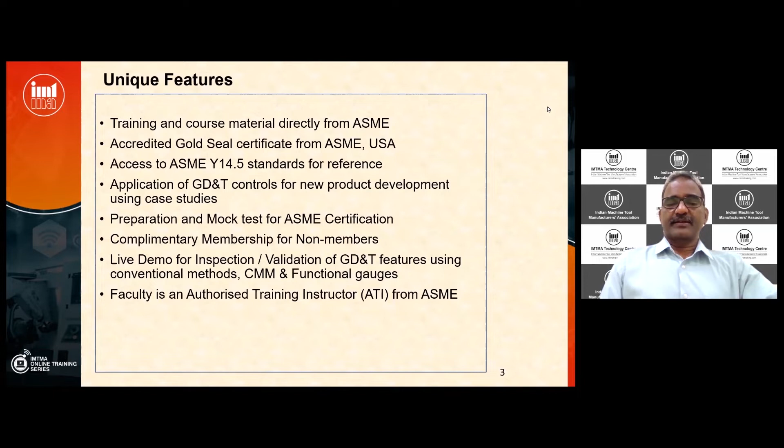And the faculty, in this case myself, I am the authorized training instructor, ATI, on behalf of ASME, and I am authorized to deliver programs on behalf of ASME in India for both technologist level as well as senior level certification programs. I had completed my senior level GDTP examination, and I am a certified senior GDTP professional.

The benefits to the participants include a complete understanding of GD&T right from the terminology up to the 14 parameters, and what is the relationship between the various controls and the terms, including RFS, MMC, LMC, then RMB, MMB, as well as LMB. And interestingly, when to use what control, which forms the important aspect of the entire GD&T domain.

We will go through a structured approach while discussing datums, that is nothing but the datum reference frame, or in short DRF. What are the requirements of datums? How the datums constrain the degrees of freedom, all the aspects.

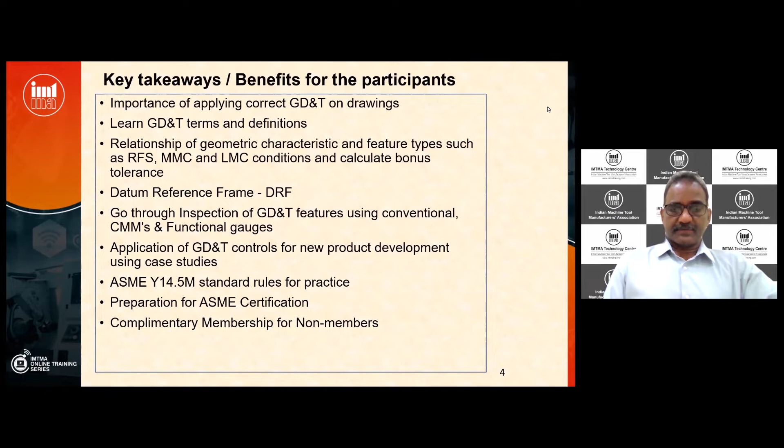Then practical inspection of GD&T controls. Then case studies to understand the application of GD&T parameters from a designer's perspective. Then what are the standard rules as per ASME Y14.5? Then tips and tricks for preparing for the ASME certification examination and complimentary membership.

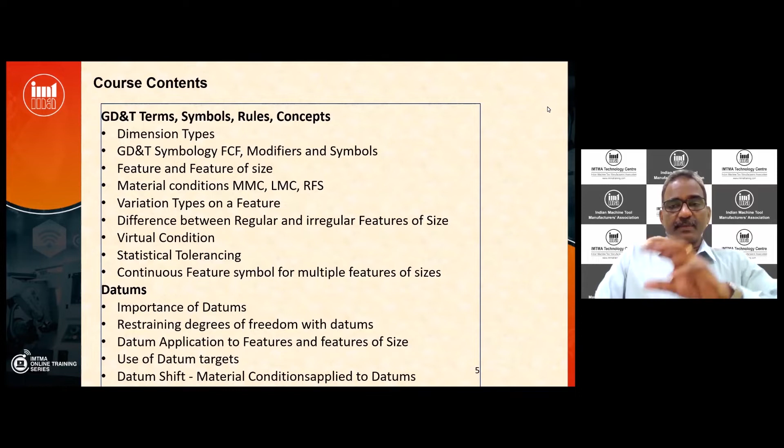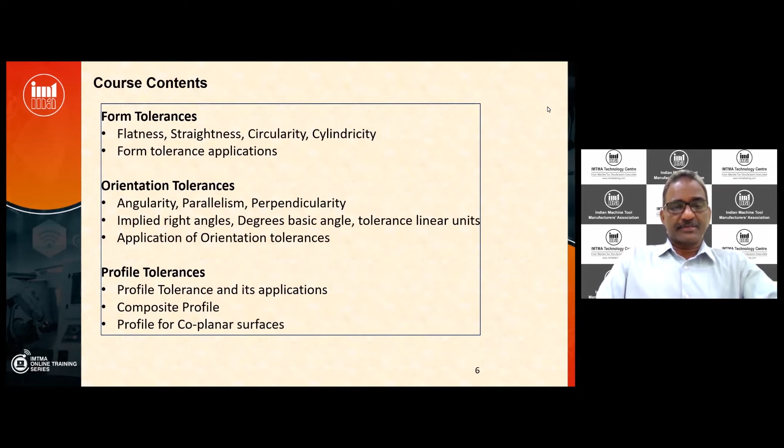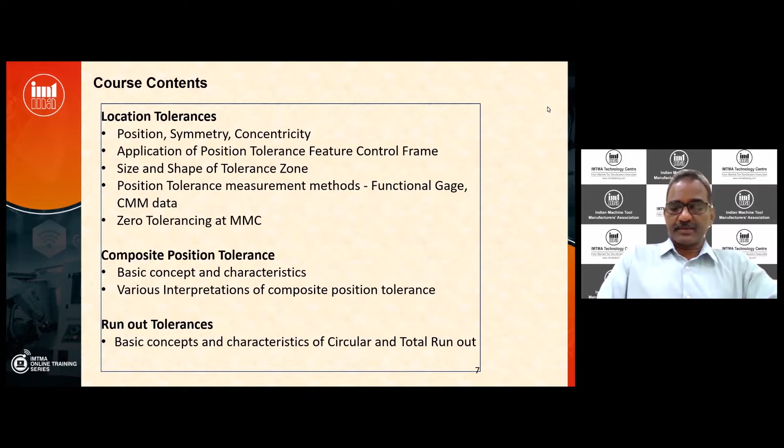The course coverage would include a complete familiarization with the various terminologies, then the datums, then the individual parameters coming under the group of form parameters, orientation parameters, profile parameters, location group of parameters, as well as in detail about the importance of position tolerancing. What do you mean by composite position tolerance? What are their applications? Then lastly, the runout group of parameters.

About the importance of GD&T, it's a well-known fact that proper implementation of GD&T in the right manner will enable cost reduction in manufacturing, as well as lead time reduction in the entire cycle of design through manufacturing.

And since GD&T is a common language across the entire value chain, that means within the functions in a manufacturing organization, as well as across customers on one side and suppliers on the other side. And today, the understanding of GD&T is more and more important as the customers and suppliers are located throughout the globe.

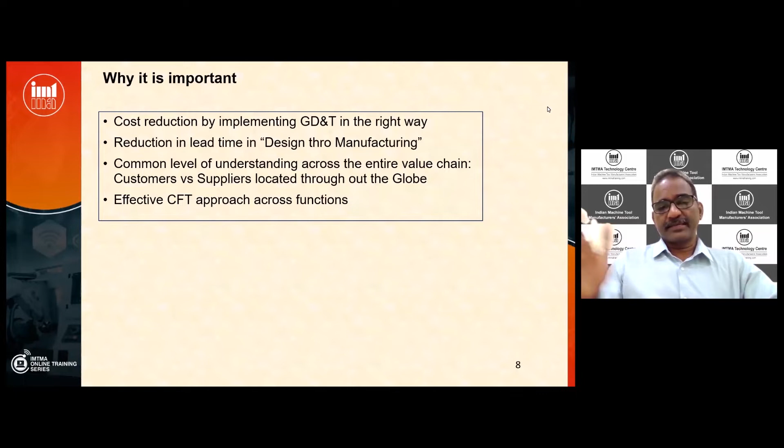And yet another important aspect which is noteworthy is that proper understanding of GD&T enables an effective cross-functional team approach, CFT approach, involving various functions within the manufacturing organization. Thereby, the better design can be evolved and day-to-day challenges can be addressed and solved, so that the entire lead time in design through manufacturing can be reduced, which is ultimately leading to cost reduction.

To whom this program would be applicable? We can say in a nutshell, this program is applicable across the organization since it is an international language, and it is applicable to engineers and executives, junior to senior level management professionals from all the functions, right from design or R&D and new product development, production engineering or manufacturing engineering, then the production and assembly, then quality assurance or quality control, then sourcing and service and application.

So thereby, GD&T cuts across multiple functions within a manufacturing organization. And as such, thorough knowledge in GD&T is essential so that meaningful communication can take place between the suppliers and customers, and within multiple functions within an organization.

And this program is not only for manufacturing organizations, it is also applicable for engineering service providers, where they undertake value-added services, right from new product development or changes in the design, updates in the design, where their customers could be located anywhere else in the globe, and the engineering service providers located in India are extending their services in various design and development and engineering functions.

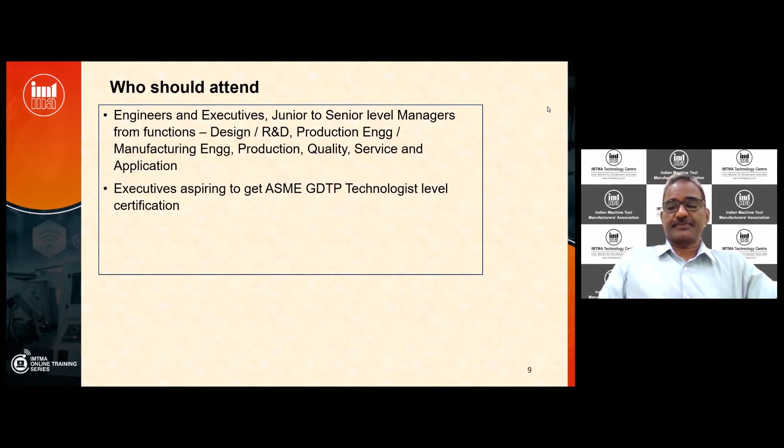About IMTMA, Indian Machine Tool Manufacturers Association, established way back in 1946, is an authorized training provider, ATP, for ASME, and IMTMA is certified for providing IACET accredited ASME training courses on this particular standard, that is GD&T Y14.5, for engineering professionals across the country.

And IMTMA has a state-of-the-art training facility called the Technology Center, located at Bangalore International Exhibition Center in Bangalore, with complete CNC machines as well as metrology lab supported with CAD/CAM, CAE, and all the other accessories. And at IMTMA, we have trained more than 2,000 professionals in GD&T across the country, from all the functions of a manufacturing organization, as well as engineering service providers, as well as aerospace industries.

And the training methodology is unique in the sense that the classroom sessions are supported with live demonstrations, as well as workbooks and group exercises, so that the understanding becomes complete. And at the end of the training program, the participants are really in a position to implement the GD&T standards in their own projects.

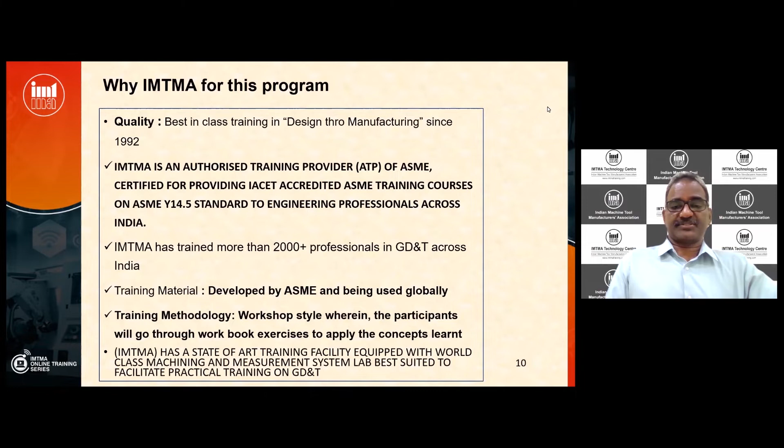And a quick word about the GD&T certification from ASME. As all of us know, ASME is the originator of GD&T standards, and the first standard in Y14.5 has been published in the year 1994. Prior to that, it was called ANSI, ANSI 1982 version.

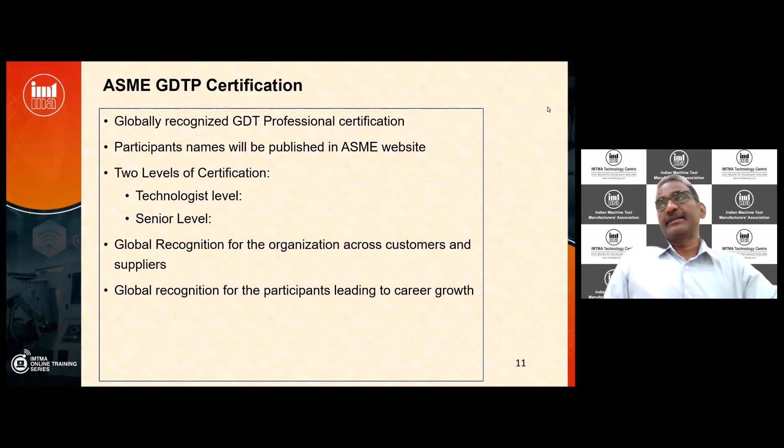And in order to give global recognition to the trained professionals, ASME has come out with professional certification in 2 levels. The first level is called the technologist level, and the second level is called the senior level. And both the levels will bring in global recognition for the organization across the customers and suppliers, at an organizational level. And secondly, for the participants, it again brings a global recognition leading to their further career growth.

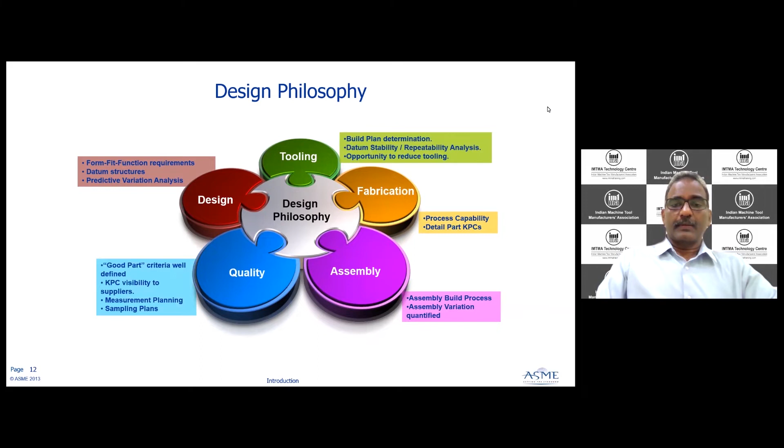Let us talk about how GD&T is applied in a manufacturing organization. Today, we live in an era of concurrent engineering rather than sequential engineering. And concurrent engineering philosophy involves the coordinated approach across multiple functions, including design, tooling, then manufacturing, assembly, as well as quality, so that the entire lead time of design through manufacturing is reduced and the complete design becomes sort of error-free, so that there are no challenges in the downstream applications, right from tooling, manufacturing, quality, etc.

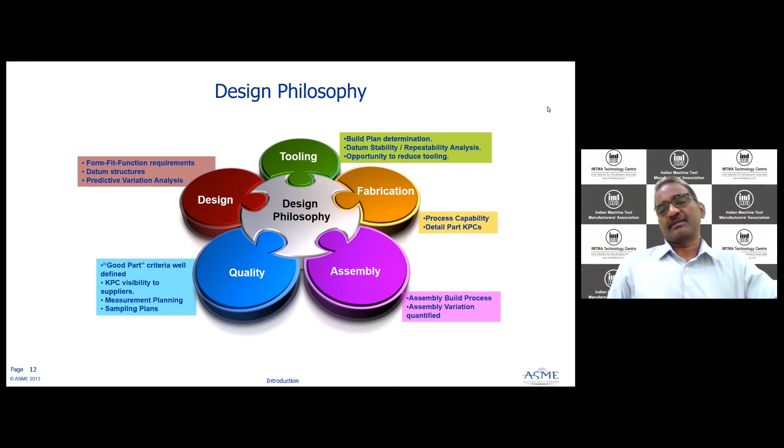So thus it involves a cross-functional team approach so that the challenges are identified at the design stage itself and countermeasures have been incorporated at the beginning before the design is frozen and released to the downstream applications. Here, GD&T plays a huge enabling role so that the intent of the designer is well communicated across the multiple functions within the organization and then again across its suppliers as well.

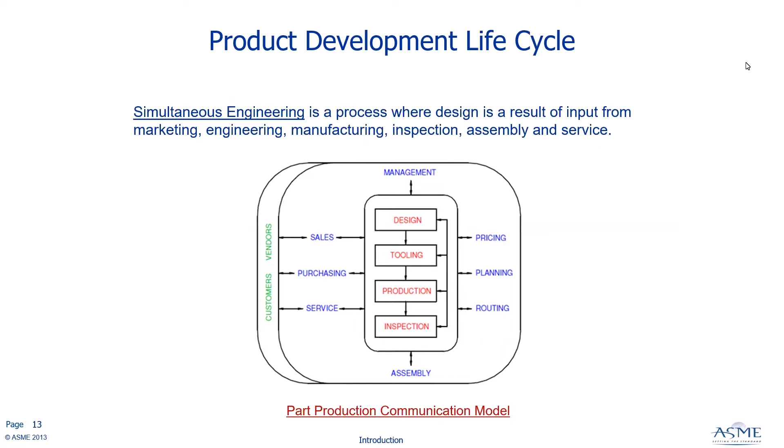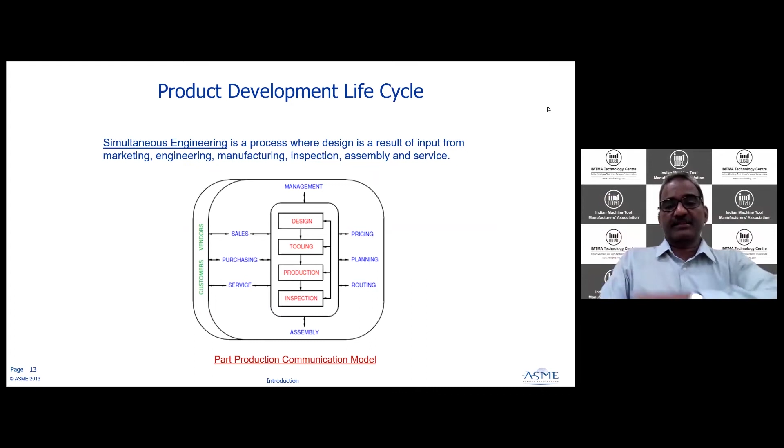And the concurrent engineering, or the simultaneous engineering, is active dialogue and two-way communication between the concerned departments so that the lead time is reduced and further challenges are minimized or nullified.

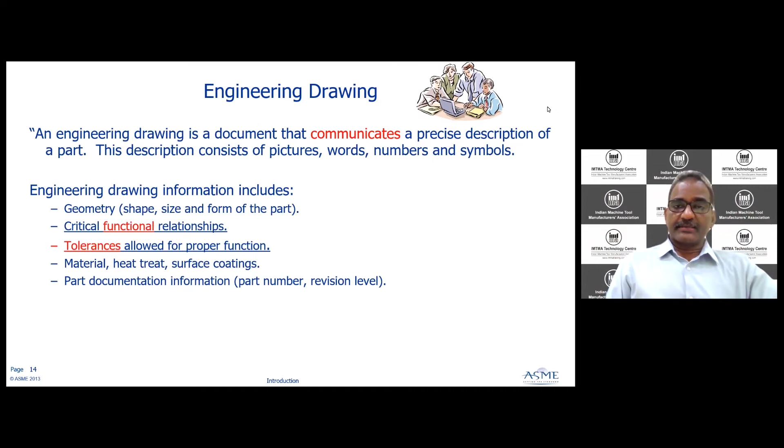And as all of us know, the purpose of engineering drawing is effective communication of the entire data, including the geometry, functional relationship, tolerances, plus the peripheral information, material, heat treatment method, coatings involved, etc., along with the documentation terminologies.

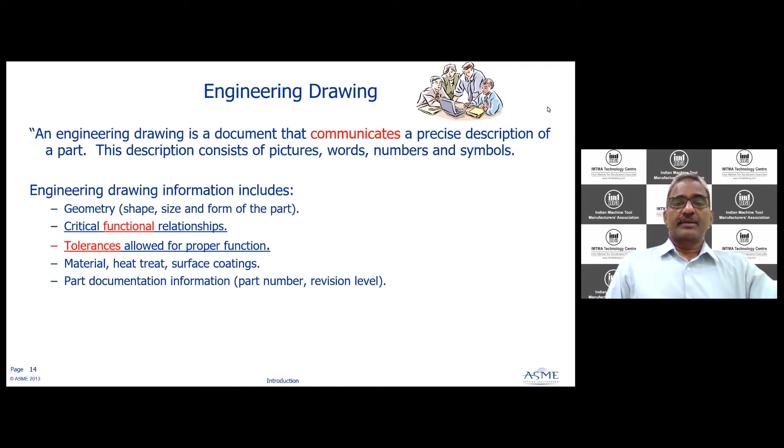For a moment, let us imagine if the GD&T symbols, which are shown in the last column, are not there, whereas the communication happens in a particular language, in this case Chinese. Then how can the activities be carried out in a global manner across multiple customers and suppliers located throughout the globe? In this particular slide, the explanation is in Chinese.

However, if you are not comfortable understanding the Chinese language, then we don't have any clue what is meant in these wordings, right? Whereas if the same information is conveyed through the symbols as listed in the last column, then the understanding becomes universal in nature and there is no need for any text, any communication in a given language. So that is the power of GD&T, which is a universal language.

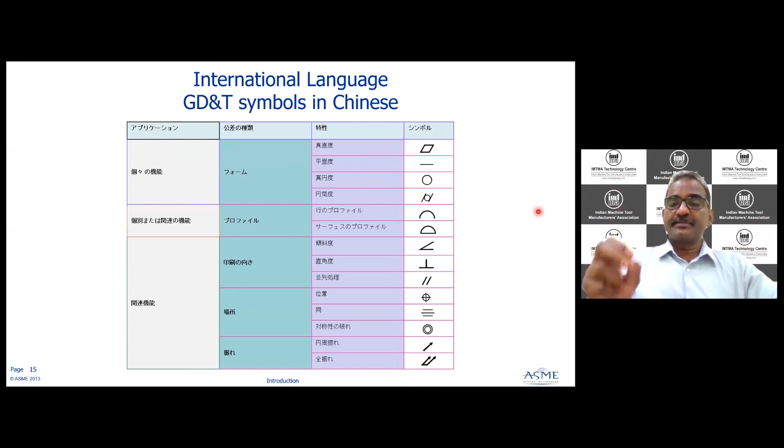Be the customer or be the supplier, located anywhere in the globe where multiple languages are spoken, communication always becomes a bottleneck and understanding becomes a challenge. The communication using symbols is quite powerful. All right. So in GD&T, each of these 14 symbols conveys a particular meaning, and we'll be dealing with the complete terminology right from the first symbol to the last symbol.

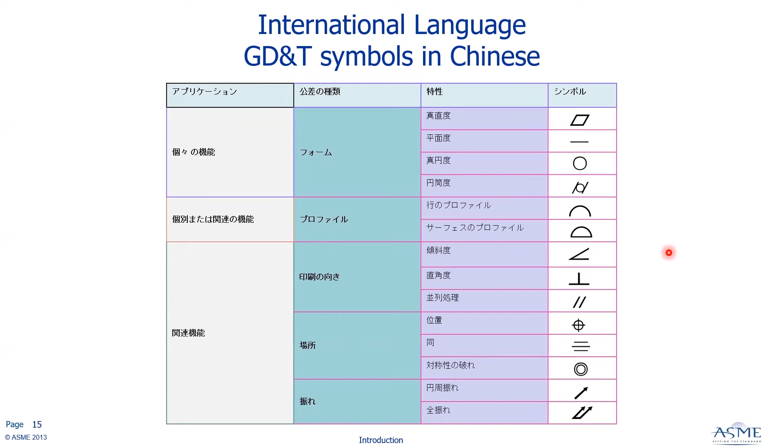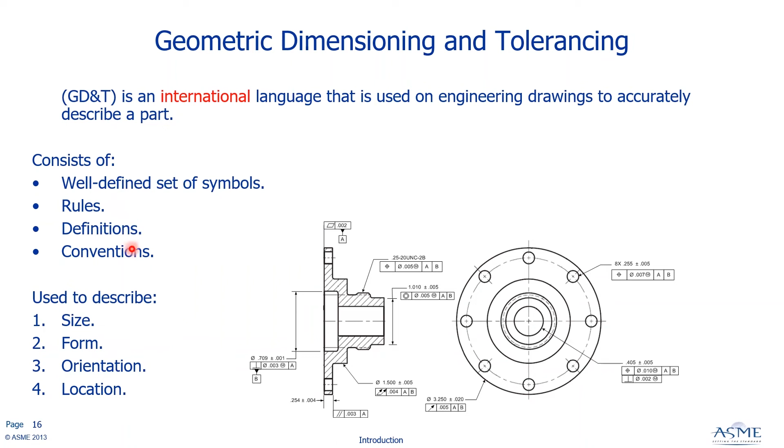So in other words, GD&T is the international language used in engineering drawings so that the part is described in an effective and accurate manner. And what is described? Information regarding the size, the form, the orientation between the features, and the location between the features. This information is precisely conveyed using a well-defined set of symbols, which we call the GD&T standard, accompanied by certain rules, definitions, and conventions, which will be taken up in detail in this training program.

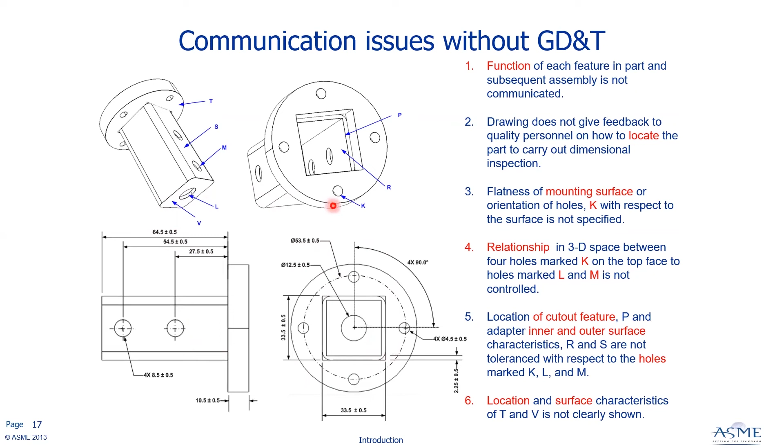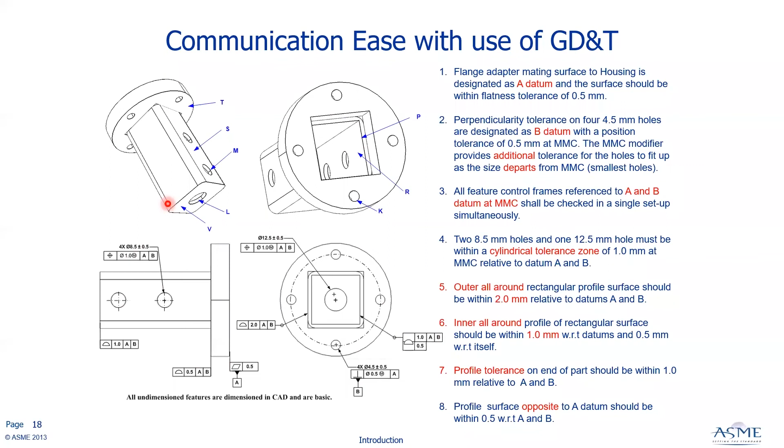This slide talks about the challenges in case the drawing doesn't contain any GD&T symbol. This drawing contains all the dimensions with the dimensional tolerances. However, there are no GD&T symbols. A better approach would be to change the drawing with the concerned GD&T symbols so that the assembly takes place in a seamless manner without any challenges.

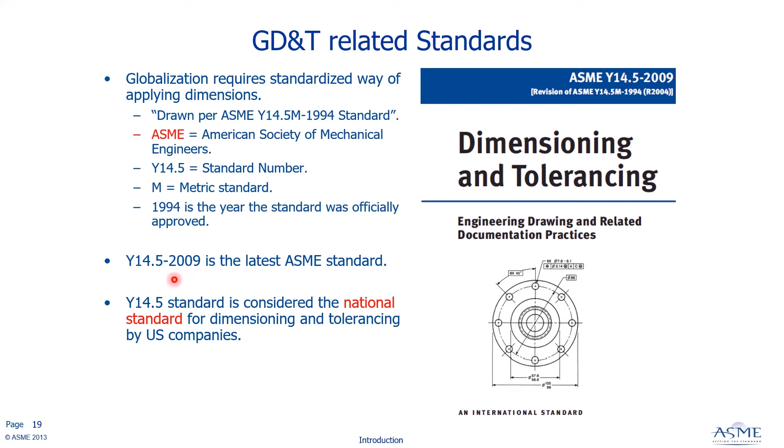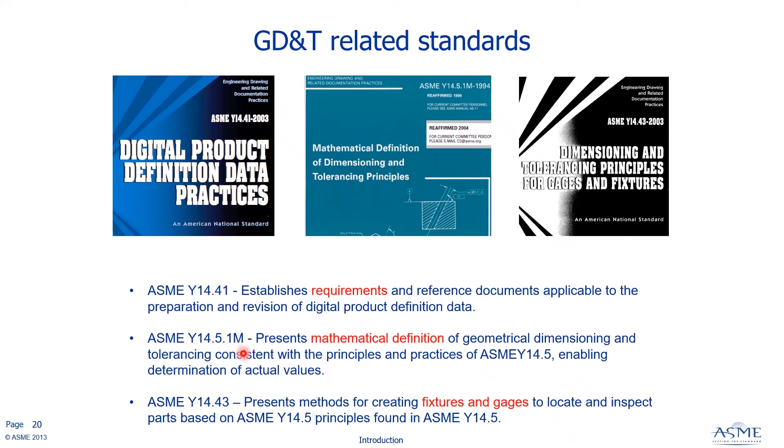Our entire discussion will be based upon the ASME Y14.5 standard, version 2009. And we'll also highlight the related standards, including 14.41, 14.5.1, and 14.43 as well. I think some of you would be familiar with many of the symbols, or at least a few symbols. In our discussion, we'll be going through each symbol in detail with respect to its application.

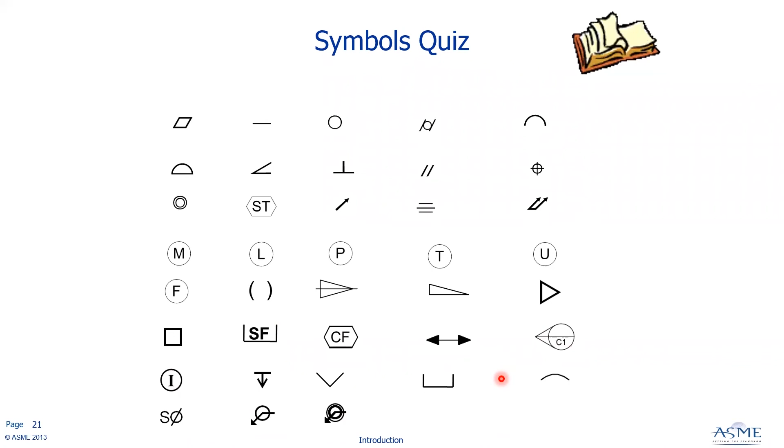The first 3 rows are called the main symbols. There are a few modifier symbols and a few additional symbols. We will understand their application. You will have a complete understanding of the meaning of each, as well as the application with engineering examples.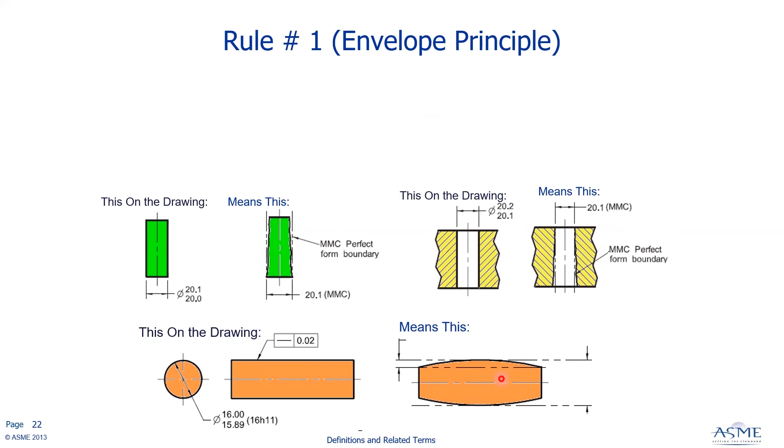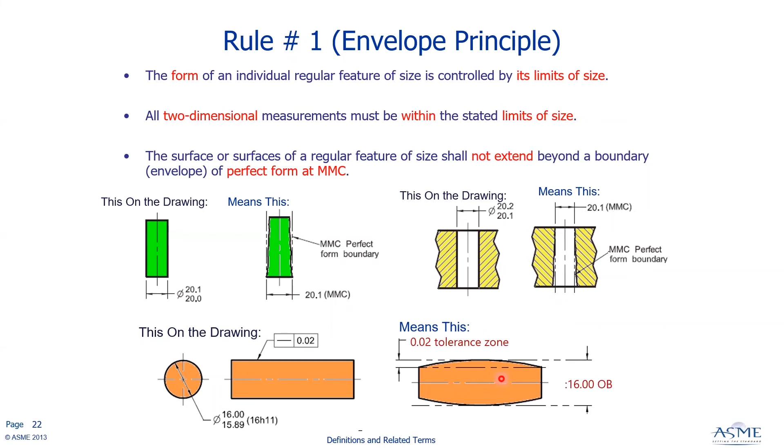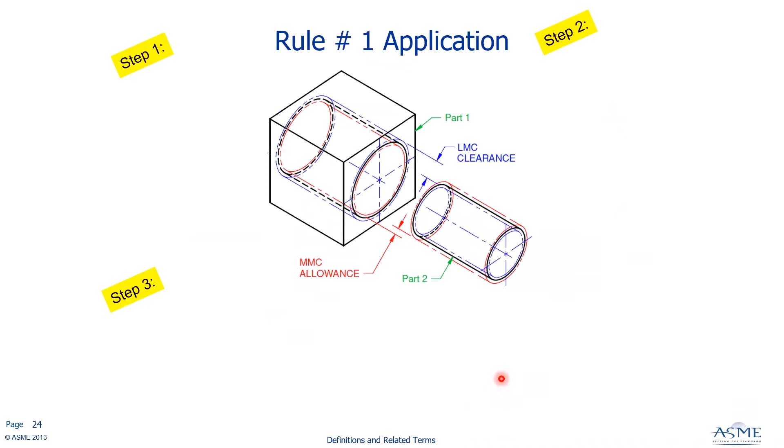And we will also go in detail to understand what rule 1 is, or in other words, the envelope principle, why the ASME standard specifies rule 1, why it is necessary, and what its functional importance is. What is the logic of having rule 1? With an application example, let us discuss and understand in detail.

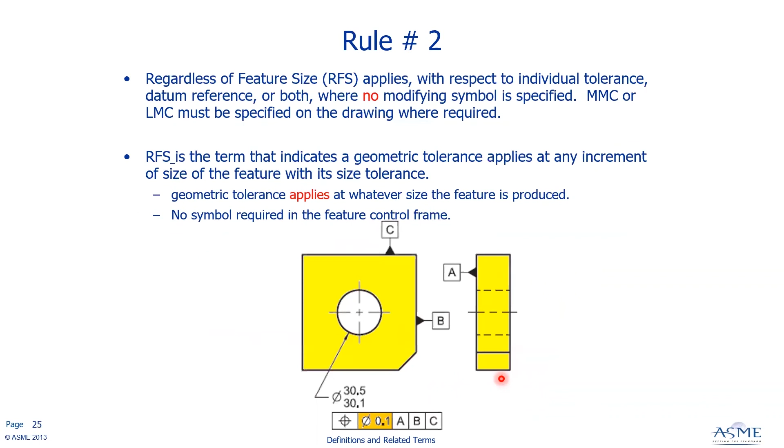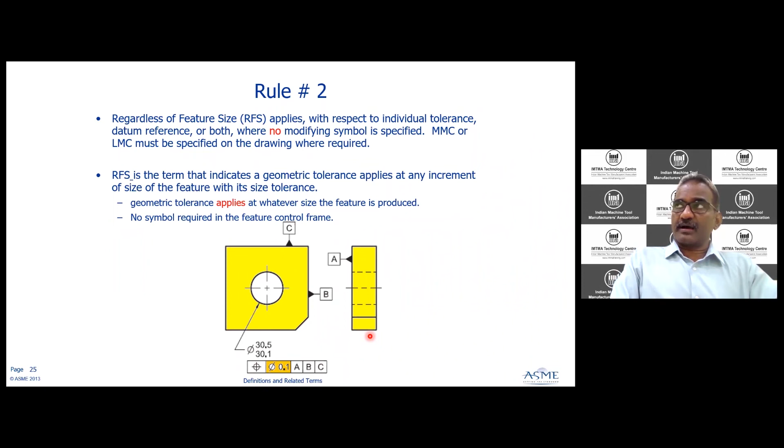Similarly, what is rule 2? What are the various terminologies associated with rule 2, including RFS, MMC, as well as LMC conditions?

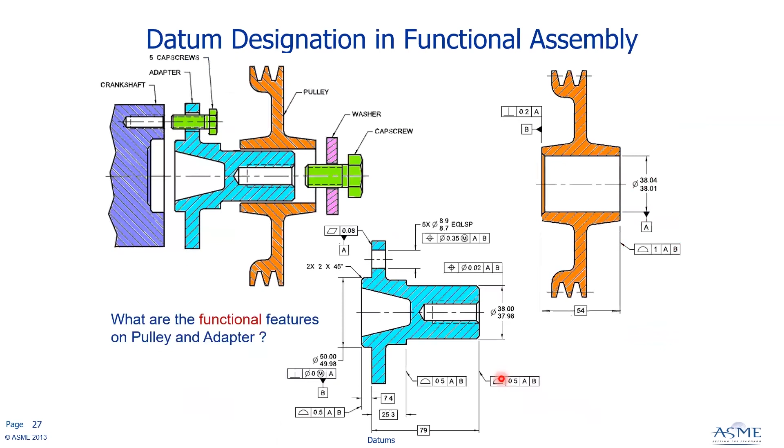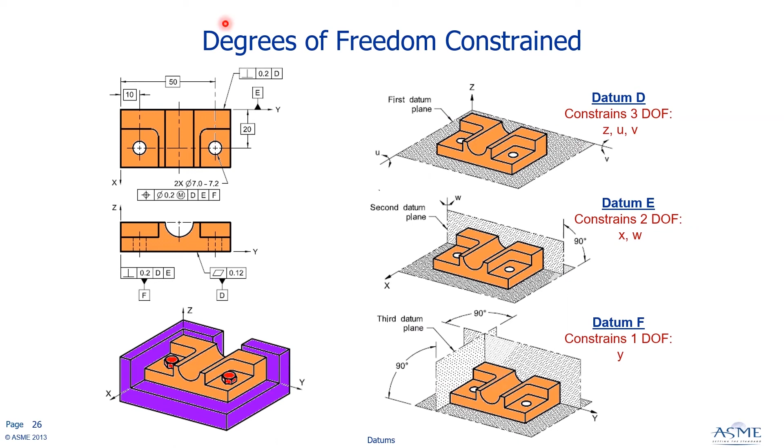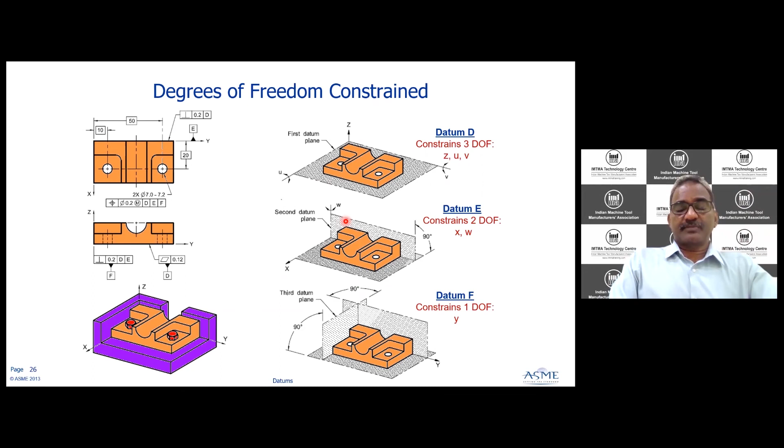Then, interestingly, we will move on to discuss the datums and how the datum reference frame, DRF, consisting of primary, secondary, and tertiary datums, constrains the degrees of freedom. For a given part, how many datums are required to constrain the degrees of freedom? Then which datum should be assigned as primary, which datum should be assigned as secondary? From a functional point of view, we will discuss a few case studies like the one shown in the example.

And we will also understand the need for datum targets. What is the difference between datums and datum targets? How to specify datum targets in a drawing.

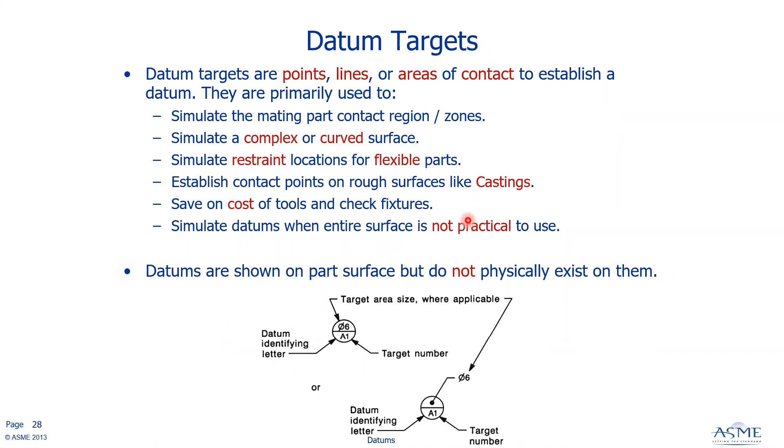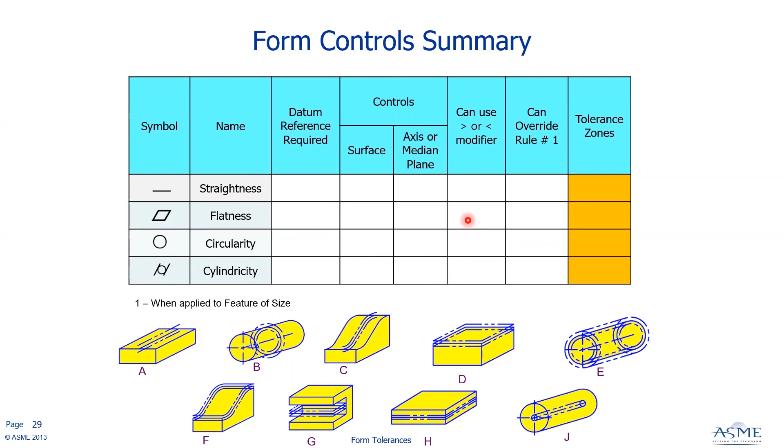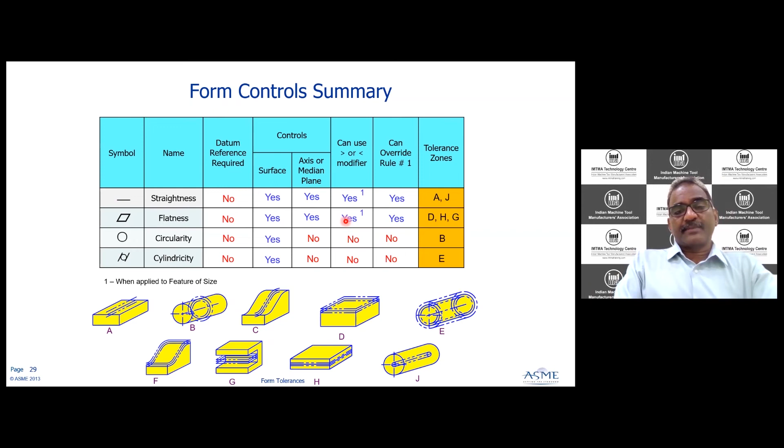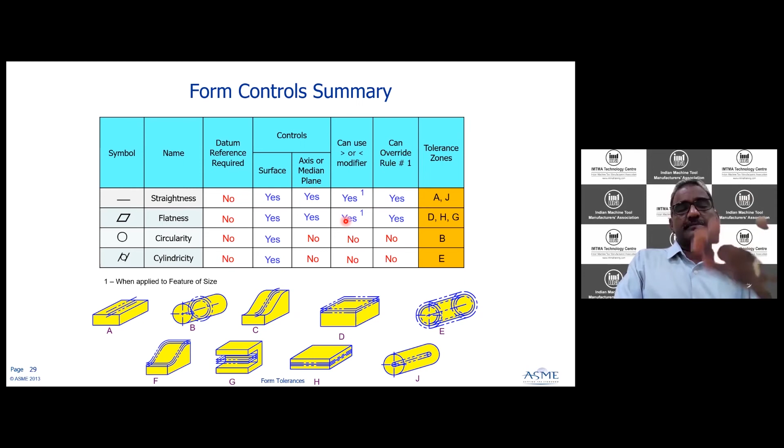As we keep discussing the individual parameters, right from flatness to runout to profile tolerance, we will have a summary at the end of each group of parameters, summarizing to which group of features the concerned parameter is applicable. Is it a feature of size or is it a non-FOS? Is the MMC symbol allowed with the particular parameter or not?

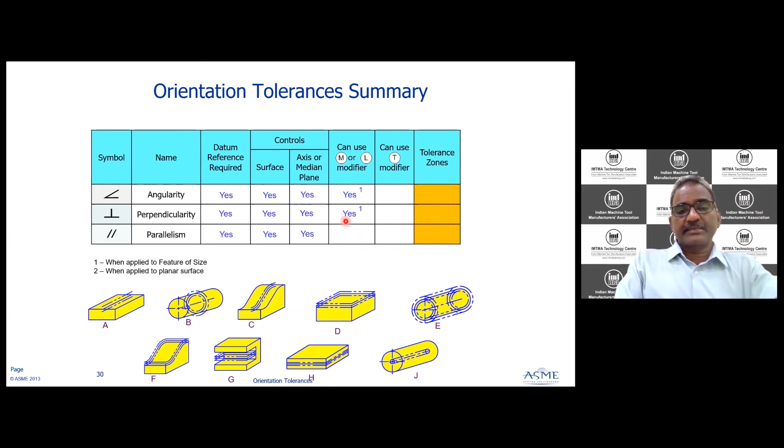So our summary will involve all these aspects so that the understanding becomes clear and we will be in a position to select and apply the GD&T parameters.

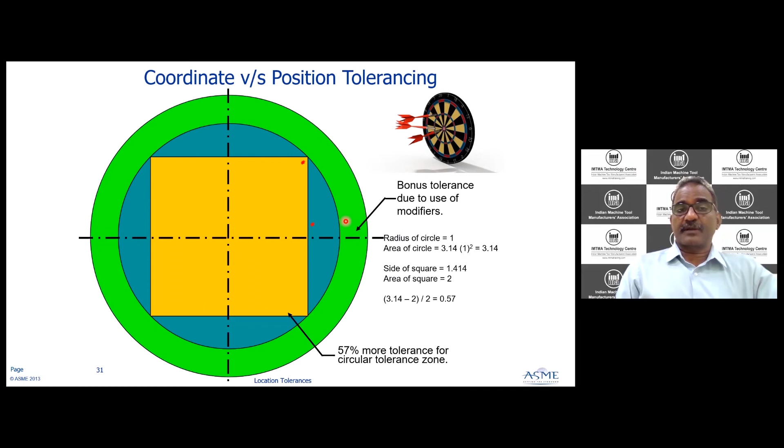When it comes to position tolerance, which is an interesting parameter out of the entire GD&T spectrum, we will understand how the philosophy of position tolerancing is different from a regular coordinate tolerancing method, and how we get an extra tolerance when we change the tolerance zone from a square or rectangular shape to a circular shape, like the one indicated in blue. Then what is meant by bonus tolerance, when it is applicable, and how do we get extra tolerance as shown in green.

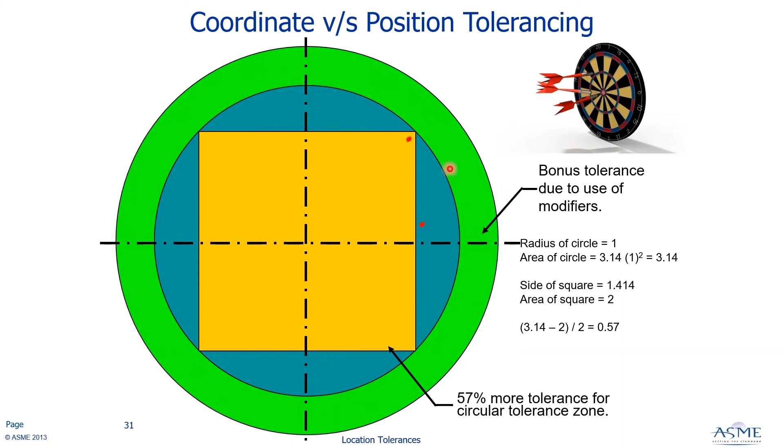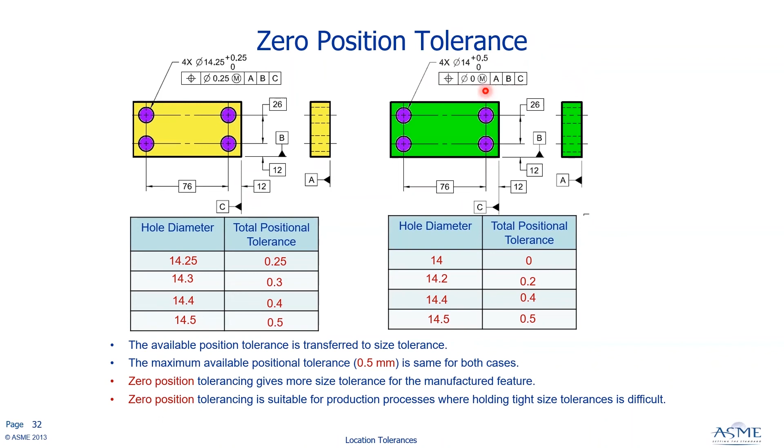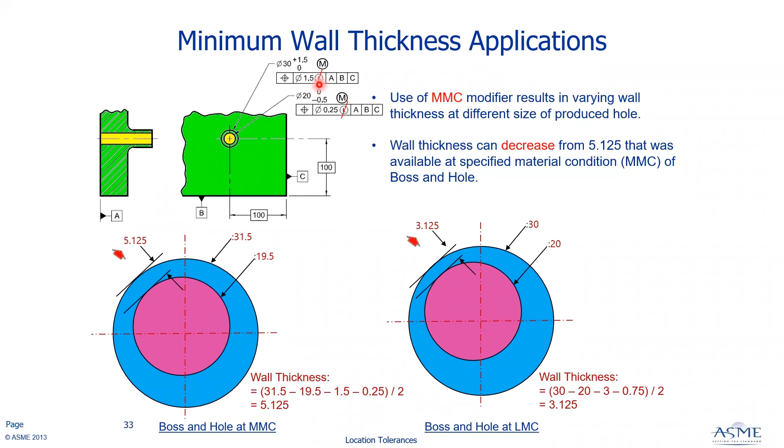We'll also dwell upon what is called zero position tolerance. Is it the right one? Is it advantageous when we go for using zero position tolerance at MMC? We'll also discuss a couple of examples on using the L symbol, which is a bit rare in GD&T applications. But still, for controlling wall thickness applications, how the LMC modifier has to be used and how we can use the LMC modifier.

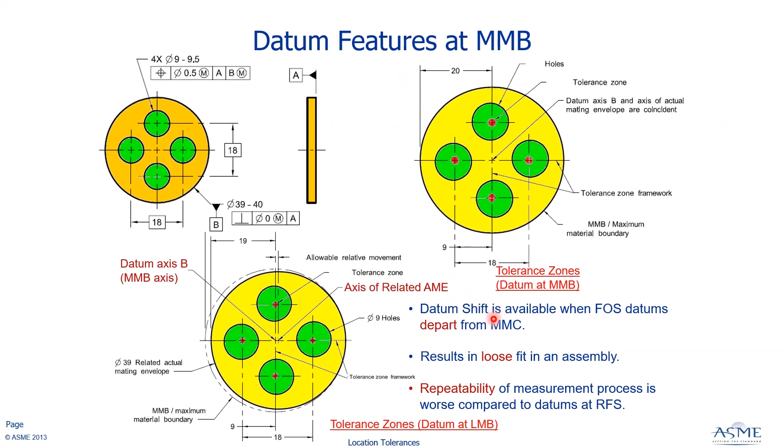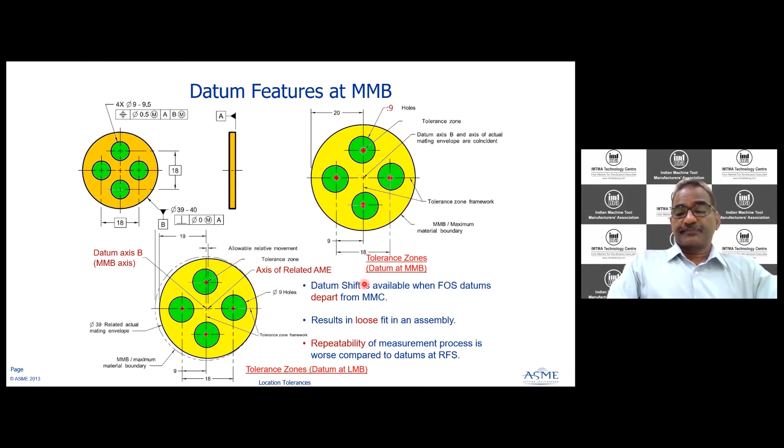Then similarly, what difference it brings in when you have modifier symbols next to the datums. Whenever you use a modifier symbol next to the datum, we get what we call datum shift. So what is the meaning of datum shift? How is it different from bonus tolerance? These aspects we'll be discussing at length.

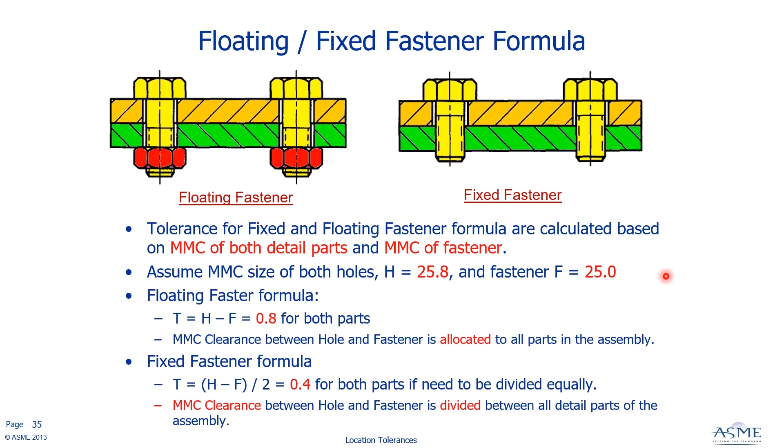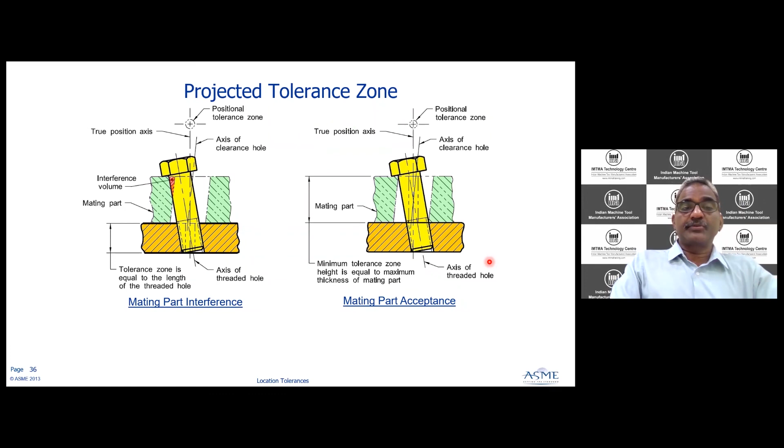Then we'll also talk about how to calculate the position tolerance based upon the assembly situation, what we call floating fastener or fixed fastener. Then along with position tolerance, there is a possibility to use a modifier symbol called P, meaning projected tolerance zone.

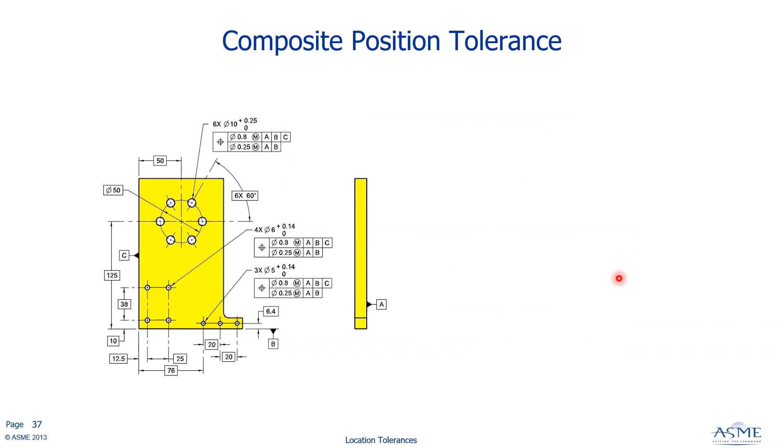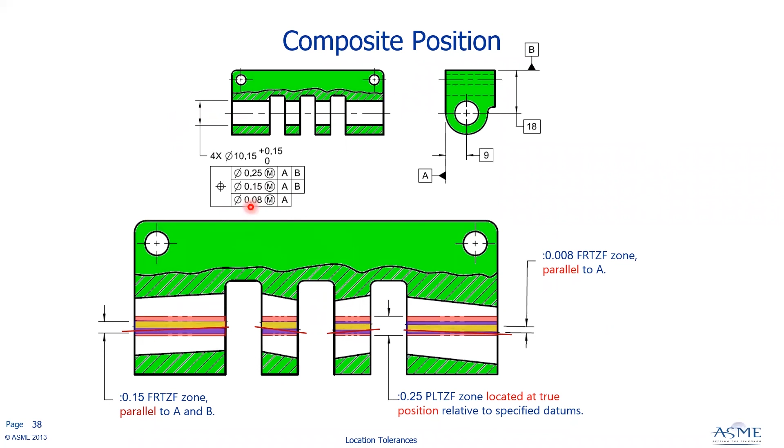We'll discuss that. Then in GD&T, especially in position tolerance, there is an interesting aspect called composite position tolerance, like this. When to go for composite tolerance, what are its significant benefits, what is the meaning? Let us discuss in more detail. Here, an interesting application of composite position tolerance is highlighted to control the coaxiality of the holes. Then we will summarize at the end of each group of parameters.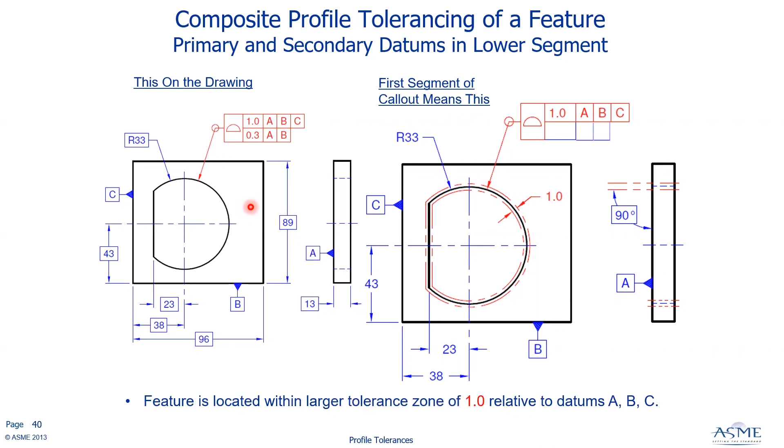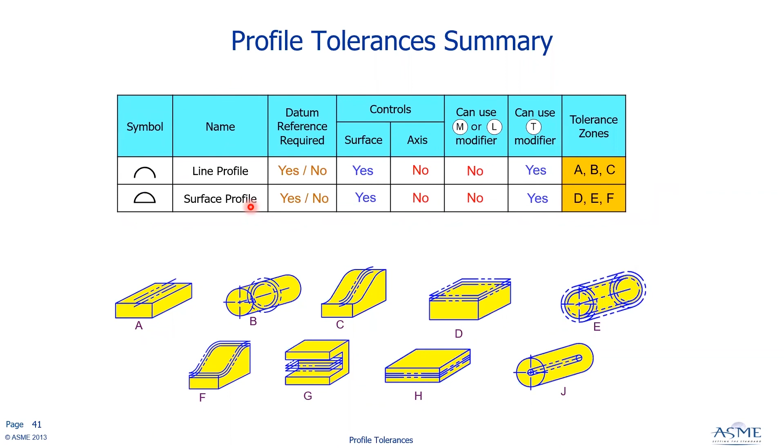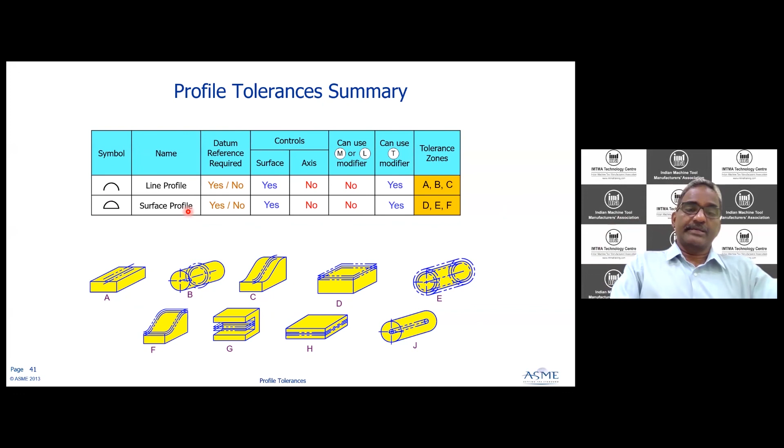Then when we talk about profile tolerancing, we'll also highlight and understand what is meant by composite profile tolerancing and what its applications are. How profile tolerances, especially composite profile tolerance, can be used to control size, form, orientation, as well as location. In other words, we'll be able to understand the powerful nature of profile tolerances and use it in our day-to-day designs. And coming to runout, we'll understand both circular runout as well as total runout with multiple examples along with a summary.

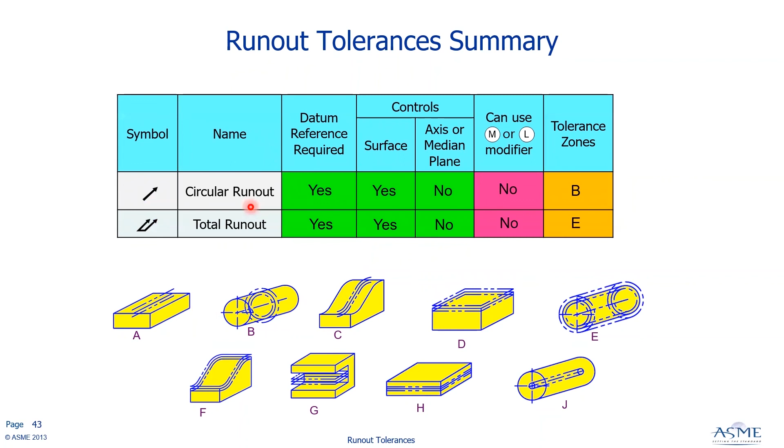So in this manner, this training program will address all the aspects of GD&T, right from the fundamentals, terminologies, the related parameters, rules and conventions, datums, then the 14 parameters with multiple examples, supported by live video demonstrations.